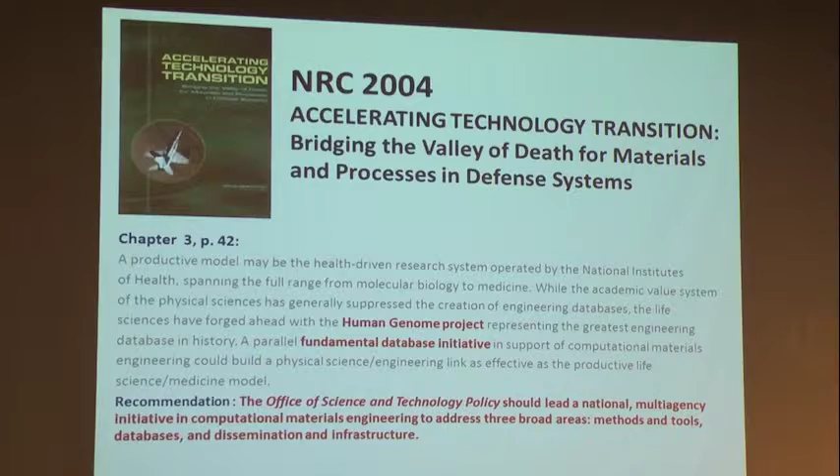Now, the White House white paper is not necessarily what I would recommend to understand clearly what is meant by the materials genome. What I do recommend is the National Academy study of 2004, which was on the acceleration of materials and process technology, and specifically addressed what have become the goals of the Materials Genome Initiative.

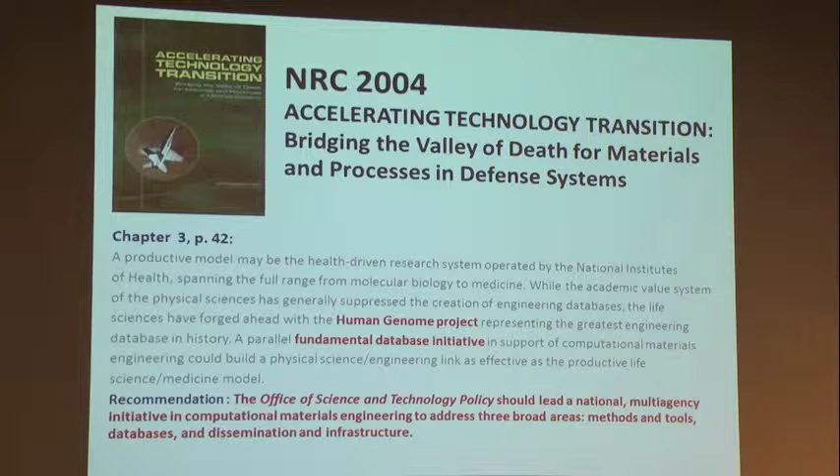This report reviewed the best practices in place in industry for this kind of materials acceleration technology, and then went on to predict what it is, what are the opportunities, where should we go, and it actually discussed the Human Genome Project as the biggest engineering database in history that was created not to support just the life sciences, but to support science-based medicine.

And so the analogy was to build out a similarly fundamental database system to not just support material science, but support the science-based engineering of materials. So I think this report gives a pretty clear concept of what is meant by this genomic metaphor.

And the recommendation went on to recommend specifically what actually did happen for the Office of Science and Technology Policy to organize a multi-agency initiative that would not only be the building out of this fundamental genomic database system, but the methodology and infrastructure, both for research and education.

The highest achievement so far in this technology was 5 years ago, with the first flight of stainless landing gear steel designed at QuesTek. This represents the first stainless steel to meet the mechanical performance requirements of aircraft landing gear and thereby eliminate toxic cadmium plating.

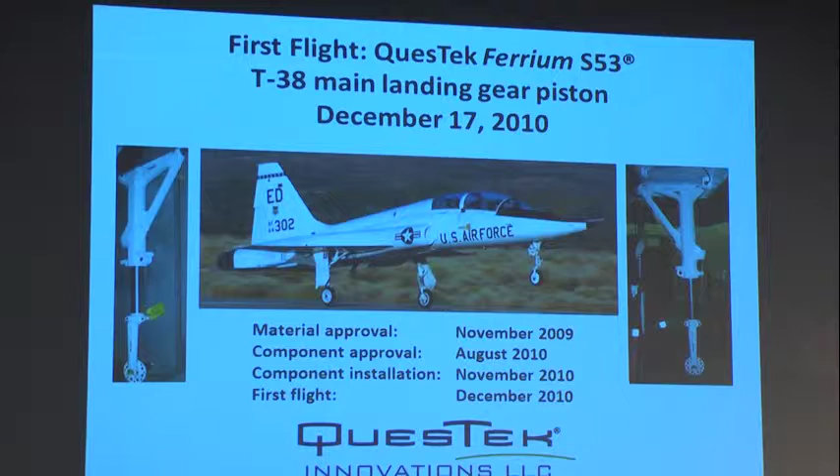But more importantly, it represents the first fully computationally designed and qualified material. This represents a certain maturity of this technology, which is acknowledged by the timeline here.

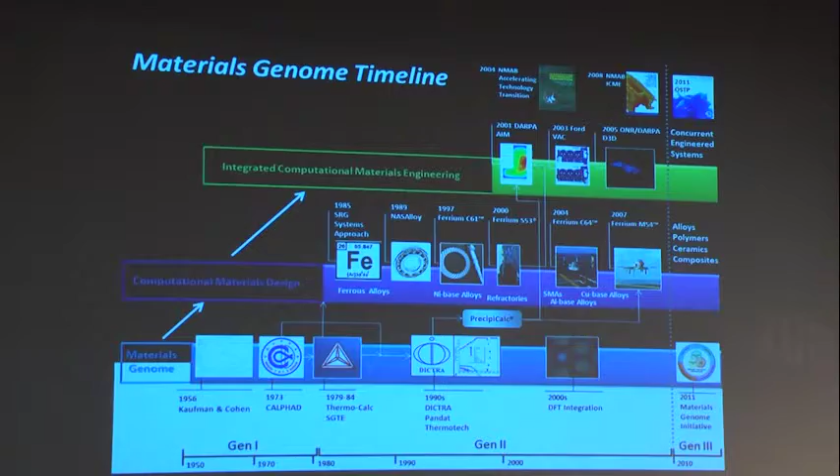There's a lot of debate about what a materials genome could be. It's quite clear that the genome we have is represented by this bottom line of the CALPHAD system of fundamental databases of phase-level attributes, whose origins can be traced back to Kaufman and Cohen in the 1950s.

It grew to be an international organization in the 1970s under the name of CALPHAD, and led to a number of small businesses and commercial software and database systems.

It has evolved beyond simply solution thermodynamics to expand to many phase-level attributes, including atomic mobilities, atomic volumes, and even elastic constants. It was originally based on empirical measurements, but as the accuracy of DFT quantum mechanical methods has improved, DFT has become an equal partner in contributing the fundamental quantities that go into those assessed databases.

Under CALPHAD, it's been well developed for inorganic materials, but really there's a parallel activity in organic materials that's as old and almost as well developed at this point.

It was the appearance in the early 1980s of the Thermo-Calc software, commercial software, and the European-based SGTE database standards that gave a new level of accuracy to this technology, and that inspired our founding in 1985 of our Steel Research Group Design Consortium.

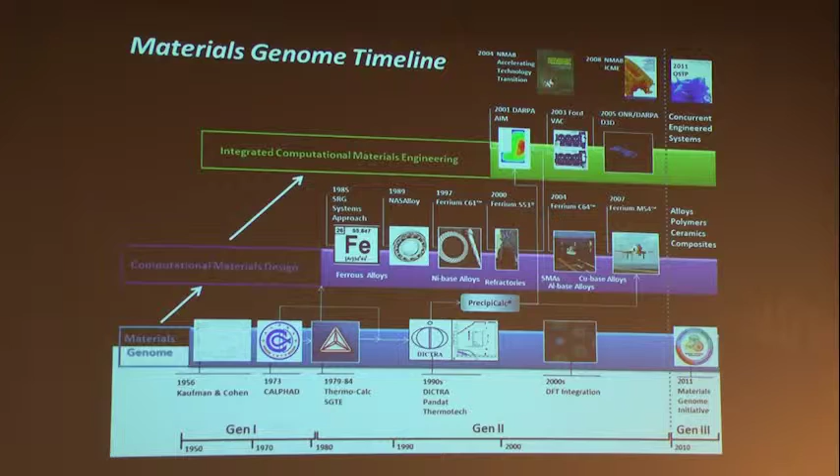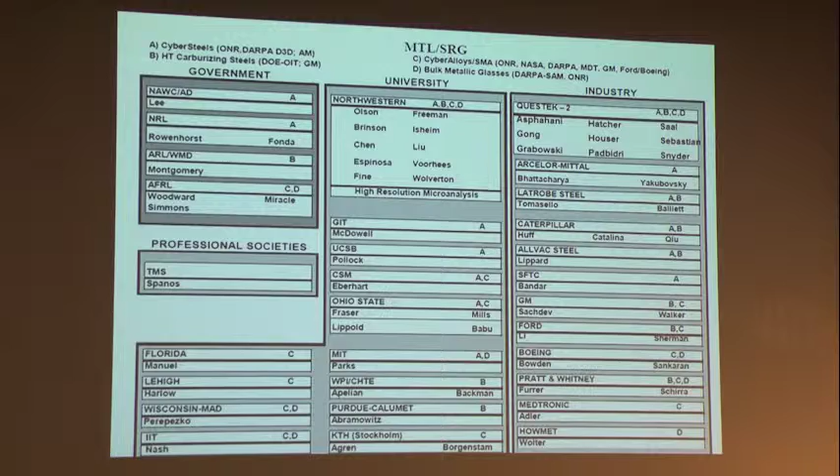That Steel Research Group in its current form has the recent participants summarized here. It's been a collaboration of government laboratories, university, and industry, representing the perspective of not only materials science and engineering, but materials users and materials suppliers.

The foundation of the approach is in the writings of the late Cyril Stanley Smith, who wrote extensively about the concept of interactive structural hierarchy in materials, acknowledging that there is an intrinsic complexity to real materials, for which he advocated we should be taking a systems approach—the same framework of systems engineering used across all other engineering fields, applying our knowledge of materials and treating materials themselves as systems.

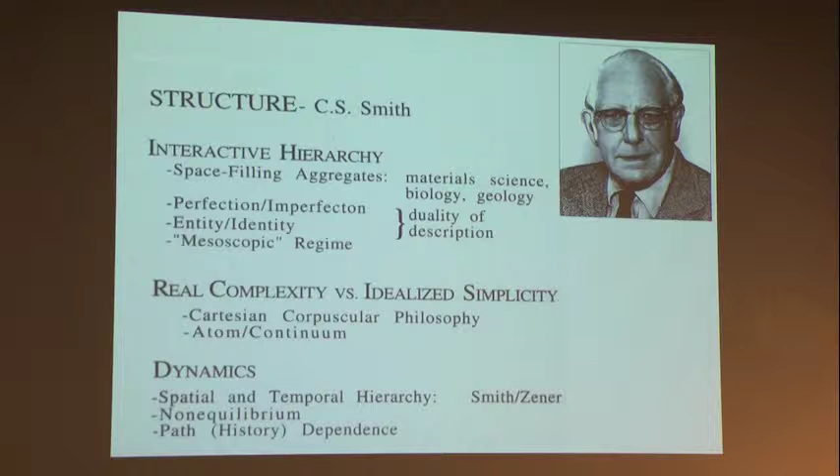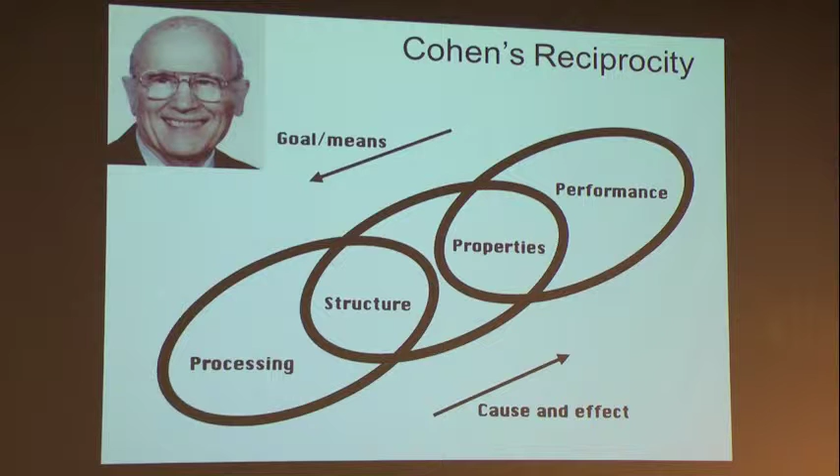We use this as the backbone of a system representation of the material, to which we then add Smith's view of structural hierarchy, so that each design project begins with this type of a system chart. This is to represent what the material is, and to start with trying to get the entire material on one page to make sure we don't miss anything important.

So what this shows is the combination of properties that determine the performance of the material in service. Those properties can be mapped back to a hierarchy of microstructural subsystems that dynamically evolve throughout the stages of materials processing. This then allows us to identify and prioritize the structure-property and process-structure links for which we want to build predictive design models.

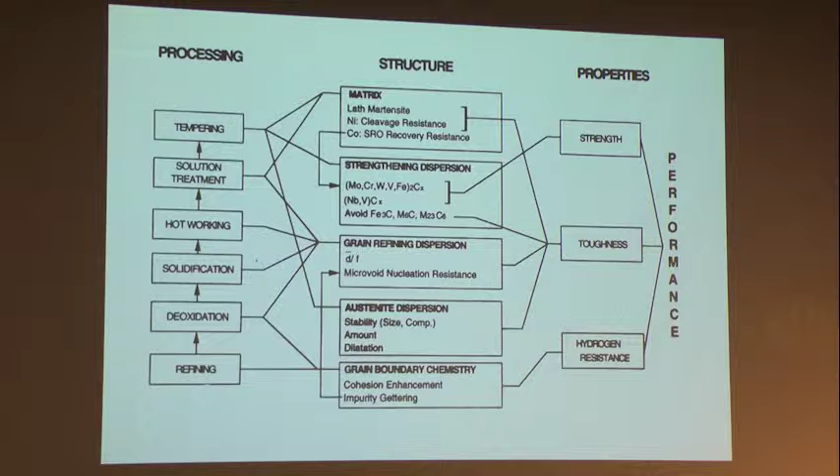Now, at that point, we could build relatively superficial empirical correlations. The opportunity, though—the much more predictive capability—is to use our mechanistic knowledge, made quantitative by these fundamental databases, to build science-based predictive tools that can go beyond interpolation to really predict bigger changes in the attributes we need to control in the materials. So that was the concept from the start.

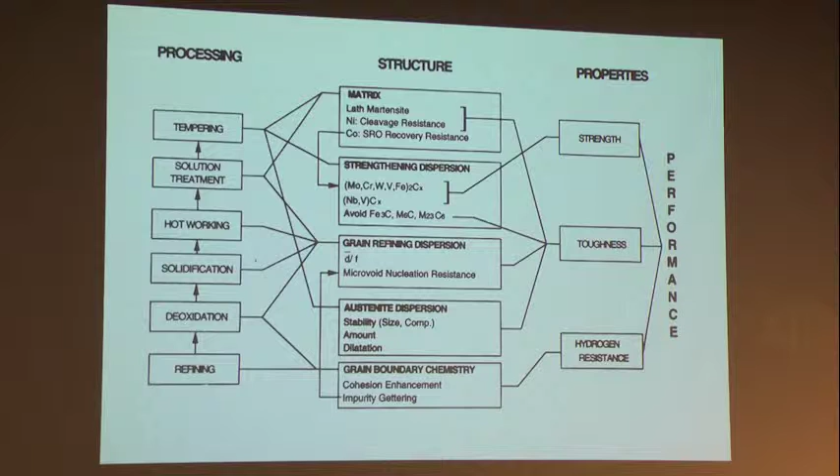And this, of course, motivated a lot of research in the 1980s to make our scientific understanding sufficiently quantitative to implement this. The models that have come out of that we used are summarized by this hierarchy, which is integrating material science, applied mechanics, and quantum physics.

So at the deepest level, as I mentioned earlier, the DFT methods have improved in their accuracy, where they are allowing us to directly predict fundamental thermodynamic quantities. Where that's been most useful is in surface thermodynamics, which is the most difficult to measure. So that's given us direct predictive control of a number of surface phenomena.

Where the material science is most quantitative is in the theory of both precipitation and precipitation strengthening, which has allowed us to treat our strength goals as constraints within the design.

Where the applied mechanics fits in is the simulation of various unit processes of fracture, which give us new structure-property relations to set new microstructural objectives in design. And it's really these three levels here that define our meeting performance goals in the design.

Equally important is materials processability, and that's addressed by our models of phase transformations—the solid state phase allotropic transformations, as well as the liquid-solid transformations, which are really the most scale-sensitive parts, very important to process scale up. The ability to model that up front means that we can constrain the design of a material for the final scale of production and eliminate empirical scale up.

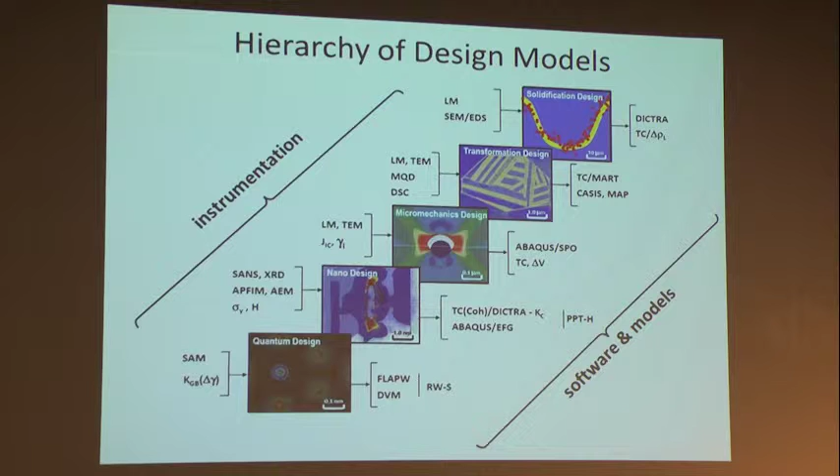And again, how we bring this all together is through a kind of parametric design that's deliberately structured to exploit the capabilities of these fundamental databases.

An example of the research that we undertook: this is a thorough study of the precipitation hardening behavior in what was the highest performance steel of the time back in the 1980s. This research was actually undertaken under a 1989 Air Force nanotechnology program that allowed us to bring together a wide array of experimental techniques of the order of ten, including small angle neutron scattering.

And this allowed us to then map out in detail the evolution versus tempering time of particle size, particle shape, number density and phase fraction, the evolution of the lattice parameters of the carbide phase and its composition trajectory, and the evolution of the hardness and strength.

This thorough characterization allowed us to validate the theory of precipitation at high supersaturations, which allowed us to parameterize that precipitation behavior, where thermodynamic driving forces control particle size and diffusion rate constants determine the time scale. This enabled a parametric approach to designing precipitation strengthening efficiency in these steels. With those methods, we've designed steels that for a given carbon content are 50% stronger than previous steels.

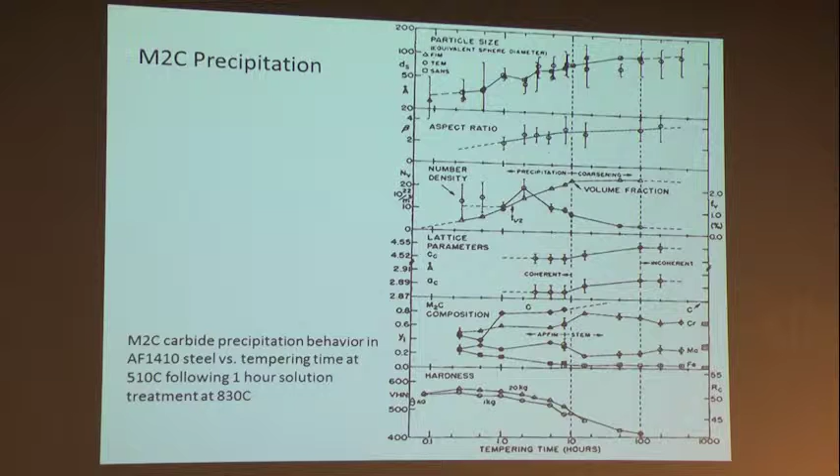One of the most ambitious problems was intergranular stress corrosion cracking due to environmental hydrogen interactions, as affected by prior segregation of embrittling segregants. A very important early contribution was the work of Rice and Wang at Harvard, who developed a surface thermodynamic description of interfacial embrittlement by these components, where the embrittlement potency scales with the difference in surface segregation energy between a free surface and a grain boundary.

Initially, unique to iron, there was enough data to test this correlation with measured surface thermodynamics. We went on to correlate the same quantity to the energy differences predicted from our DFT calculations, showing that we could correctly predict the relative embrittlement potency of phosphorus and sulfur, and the cohesion enhancing effects of boron and carbon.

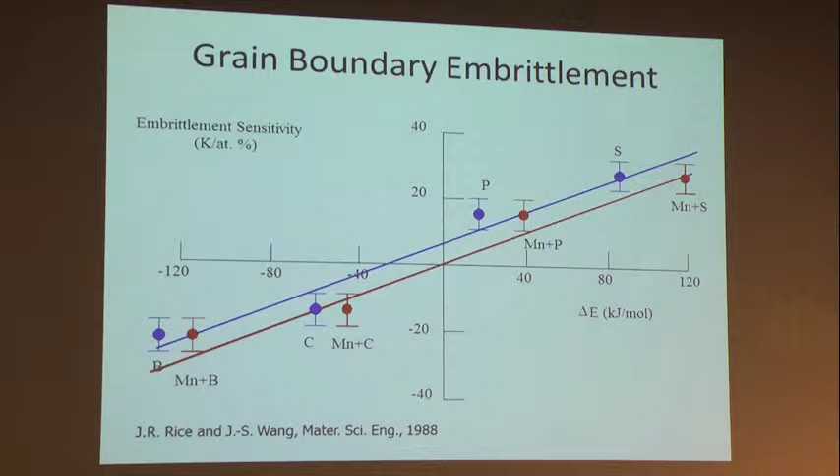Less well known at the time was the role of substitutional alloying elements. The same methods were used to predict their effects for a handful of cases with rigorous calculations, which calibrated a simplified model to make these projections, allowing us to identify the largest negative numbers—the strongest substitutional cohesion enhancers. This was then validated with more rigorous calculations.

This was then used to design the first of what we've called our quantum steels, where by designing new compositions to control grain boundary composition, coming directly from a quantum mechanically predicted genome, we have completely eliminated the intergranular mode of stress corrosion cracking in these very high performance steels.

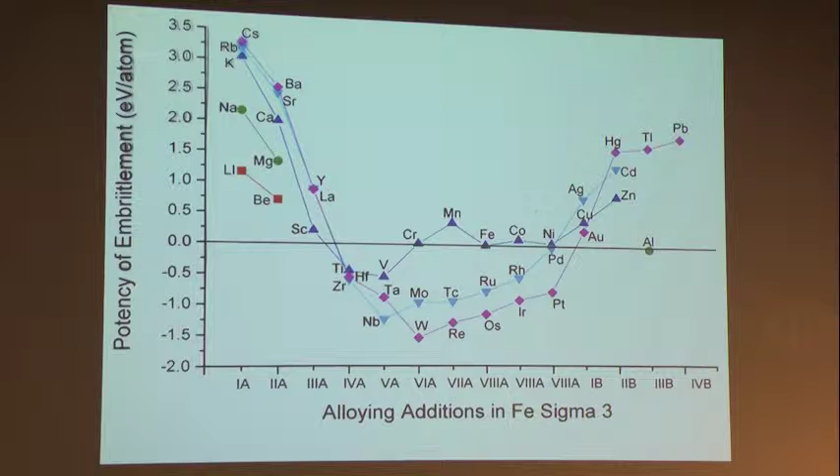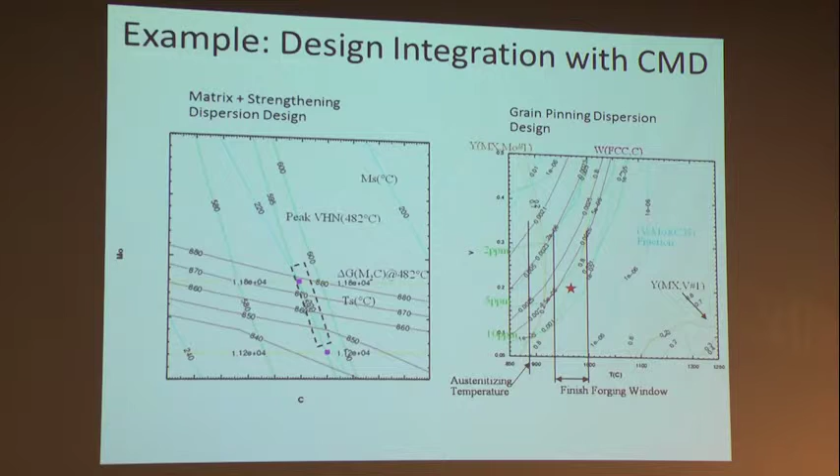This has yielded the first four commercial steels represented on this chart. In addition to the stainless landing gear steel, we have a high toughness steel for carrier-based applications that's been flight qualified, and a pair of very high performance gear steels doing well in off-road and on-track racing, currently being qualified for helicopter applications. All four use efficient strengthening through control of the carbides, where in every case the carbide size is optimized at 3 nanometers, as validated by 3D atom probe reconstruction.

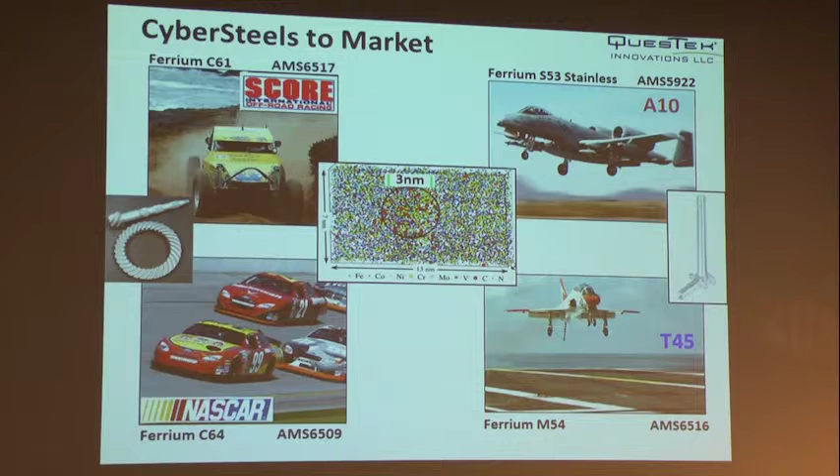Now that's the achievements of the design process. This is a summary of the normal process of empirical development, where on laboratory to small scale, we will find prototypes that meet our requirements. We would then start experimental scale-up and process optimization at the component level, and ultimately measure manufacturing variation so we can specify minimum property design allowables.

The process of materials design really only itself impacts this first leg, which amounts to only 10% of the time and cost of getting a material to an application. So it was the goal of the DARPA AIM program, starting in 2000, to look at, based on the success of the methodology demonstrated here, what is the methodology and tools that can address the rest of this cycle that would really have the impact.

Our opportunity under the AIM project was to do this in collaboration with Pratt & Whitney and GE in the context of aeroturbine disc alloys. This introduced us to the architecture of computational engineering of aeroturbines, where all these different tools of macroscopic behavior and processing are linked together by the iSIGHT process integration design optimization software system.

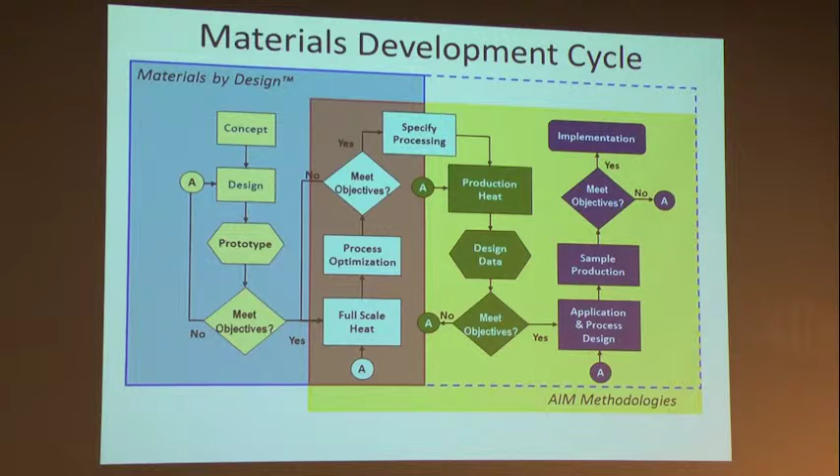What was necessary under the AIM program was to build a microstructure simulator, PrecipiCalc, that we could then link to heat transfer simulations to map the evolution of rather complex microstructures in response to the thermal history as a function of position in a turbine disk.

We also had to calibrate and validate structure property models that were implemented as analytical functions, and that was done in a spreadsheet. So really, PrecipiCalc was the new numerical simulator that we had to have to enable this technology.

After calibrating against existing turbine disks, a demonstration project was done where a subscale turbine disk was designed using these tools and tested to overspin failure to validate the performance predictions. It also gave us the opportunity to section companion forgings and validate the predicted spatial variation in the forging of microstructure and properties, where we were able to predict that spatial variation well within part-to-part variation.

Then that sets the stage for what was the most ambitious challenge: the early forecast from limited data of the distribution of properties, in this case yield strength, that would come from the allowable variation in process specifications over 6 stages of turbine disk manufacturing.

The strategy we developed there was to use our mechanistic models to get the shape of this cumulative distribution function, and then use limited data to recalibrate that by linear transformation only, where the idea is limited data can only inform the first 2 moments of the mean and variance and cannot define shape. So what we need from science is the prediction of the shape of the distribution. Limited data can give us that final calibration to give us accuracy.

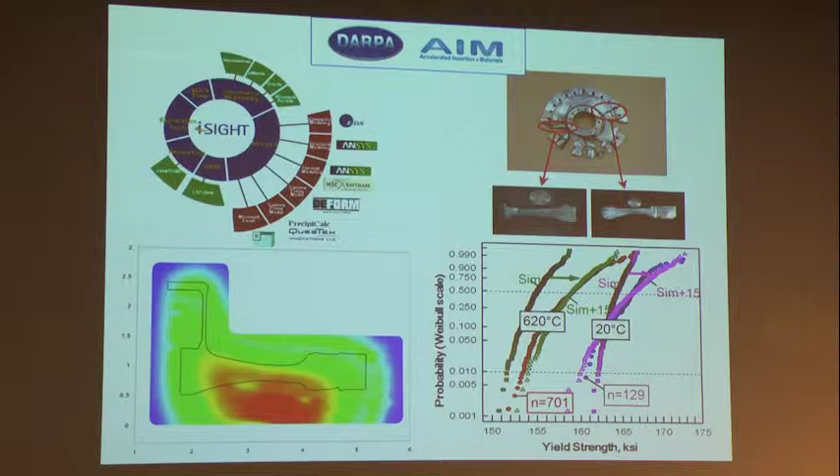As I mentioned, it was the 2004 study that was specifically focused on this kind of technology acceleration and best industry practices, and concluded that the best was, at that time, what had been achieved in the DARPA AIM program. Now, there's been a lot more attention given to this 2008 study that coined the term Integrated Computational Materials Engineering. But this actually cited examples that wasn't about new materials. It was about better application of existing materials with models. I think as well that to generate broader interest in the technology, it kind of set the bar low in terms of what some of the industry practices were under this umbrella.

It unfortunately created a sense that this technology is rather immature, where ironically, the earlier study actually emphasized the maturity of the technology. But I think another important characteristic of this study, and there have been now about 7 National Academy studies pointing to the potential of this technology, it was the 2004 study that uniquely really called out the leading role of the network of small businesses that have actually created and maintained this technology.

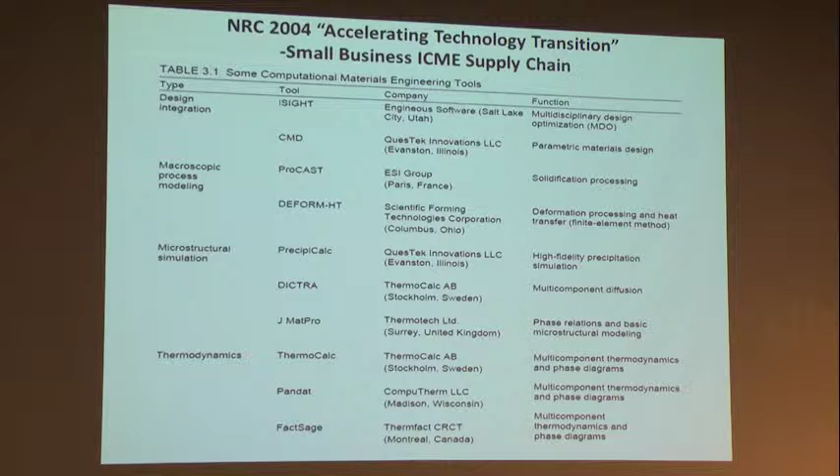This is a summary of where we were a decade ago in terms of the companies and the softwares and database systems that they've maintained to really generate this technology and continue it. And I would say today, this is still where the forefront is of this technology.

So the stainless landing gear steel I described earlier was actually brought into the DARPA AIM program. It was designed concurrently with the creation of the AIM methodology. It was brought into the program to be the first demonstrator of the application of this method to a new material.

Under follow-on funding from DARPA, the goal was to take the data we would have from 3 production scale heats of the material to make an early forecast of the 1% probability A basis allowable that ultimately has to be statistically demonstrated with 10 full-scale production heats, which is a lot of expensive inventory of steel.

This shows the predictions that were made. The blue curve is the Monte Carlo simulation of the shape of the function. This is the calibration of the first 3 heats. This then is the final validation where we meet all the requirements of the 10 heats. And once again, we got that 1% probability value within 1 KSI.

In this case, in order to be a drop-in replacement, it was vitally important that we match this 280 KSI minimum number that allows us to replace the existing steel without any design changes of the components. In practice, at the level of 2 heats, these forecasts were able to show that we were at risk of not meeting that quantity. So we were able to re-optimize the processing very early in the qualification program and save a lot of time and cost to meet that requirement.

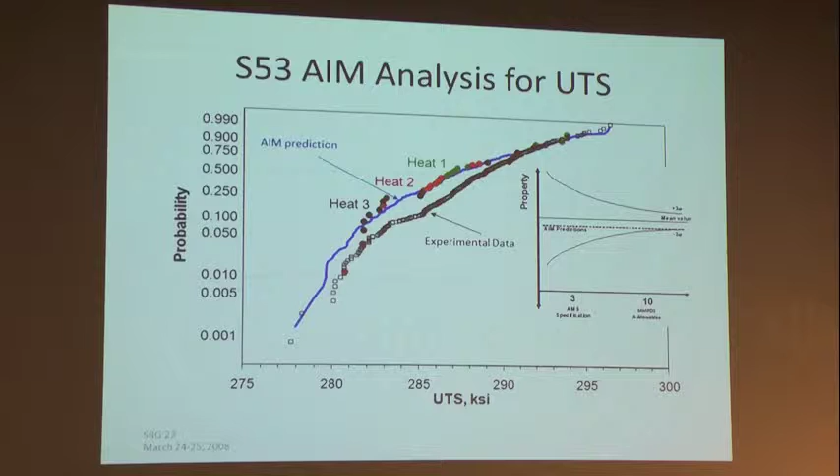The Navy's been the largest supporter of this technology. This was a slide we put together during one of our Navy projects to show the range of applications of this technology that QuesTek has undertaken specifically for the Navy, that cuts a broad range of not only different alloys, but even some ceramic systems as well.

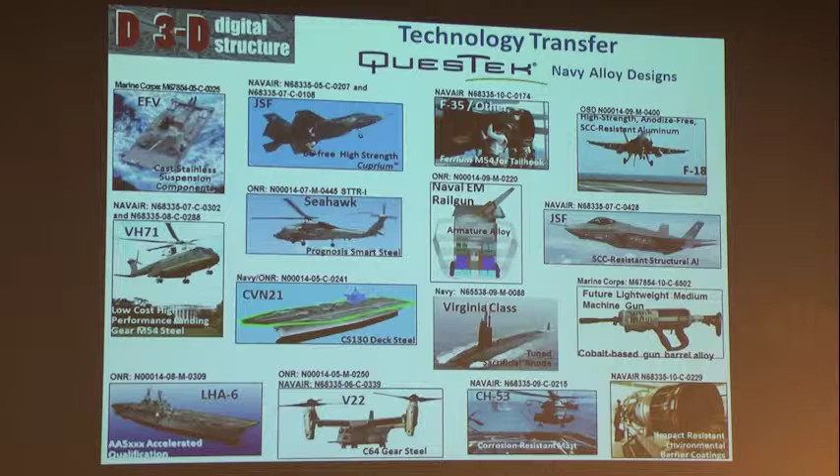More importantly, having done it once before, while we were doing this, it was possible at the level of the first 3 heats that the Navy had enough confidence in our forecast that they went ahead with a manufacturing technology program to apply this new steel in the hook shank application for the carrier-based planes, basically the tailhook assembly, which is a very critical component, and start that manufacturing technology optimization early enough that within 1 month of getting material level qualification, we actually had component level qualification by the ability to make that engineering decision much earlier. So it's not only that we're compressing the materials qualification cycle, we're also compressing the full application cycle through this.

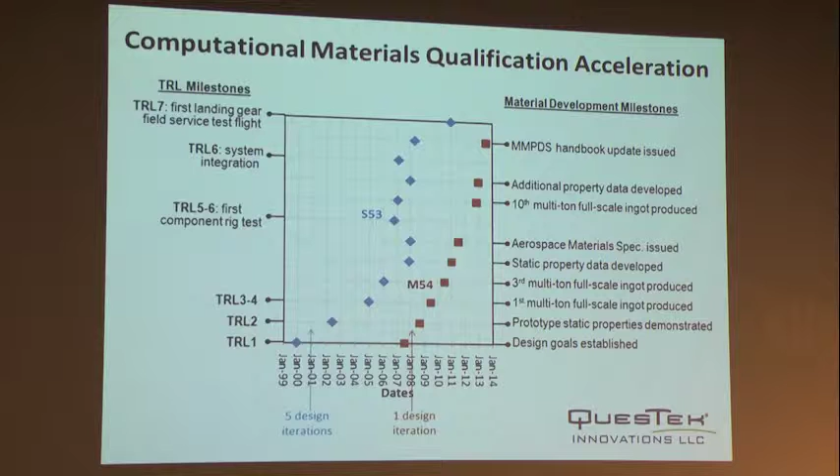Now, both of those examples are from the viewpoint of compressing the materials cycle under conditions where we're trying to be a drop-in replacement. We don't want to change the component. We don't want to redesign. That would slow things down. I think the ultimate impact of this technology is the opportunity for concurrency. Just about all other branches of engineering except materials are able to work together to accelerate the full technology development cycle, and with this acceleration of materials cycle, we can then become a part of that and look at the value of the concurrent development of materials and structures.

Where we first explored that a decade ago is in an upper undergraduate interdisciplinary design project course, where we were able to draw on 2 channels of Navy-supported research at the university. One was novel panel structures for weight-efficient blast protection, and the other was new steels we were designing for blast protection. In the context of anti-terrorism blast mitigation, this team for the first time looked at taking those simulation tools for the study of the structures, plus the new properties we projected as designable, and put those together. It forecast what performance could be achieved, but most importantly, it actually redirected the materials design work to meet new property objectives, and that research is still underway since then.

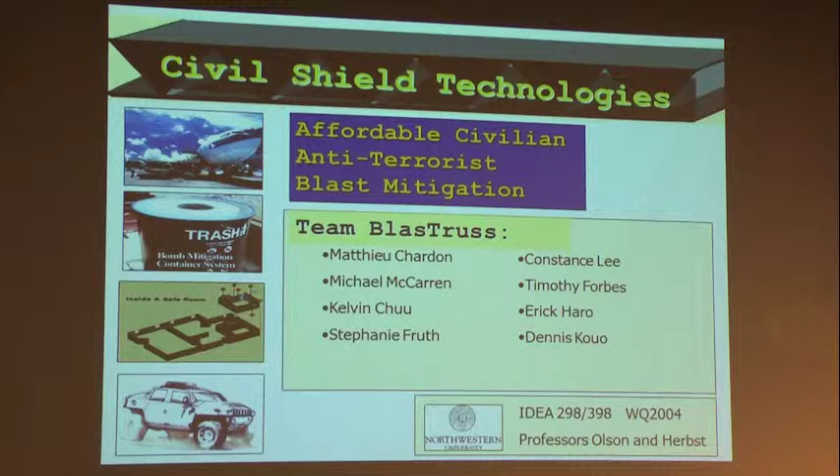As far as the highest achievement in that kind of concurrency, the best example is what was announced in September in the Apple Watch. It's not unusual that Apple does market their materials as part of their products. This is the first time that Apple marketed their own materials. There actually were 4 new alloys with very significant performance improvements that were announced with the Apple Watch. It turns out that those ambitious property achievements, the materials were created and fully integrated into the product in just 2 years from acquiring the technology to do it.

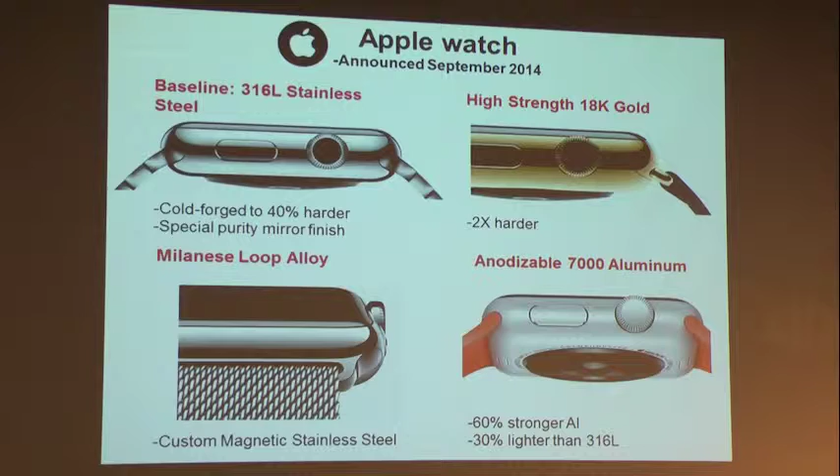Now, the AIM project, we found that relative to standard metallographic characterization, we were predicting microstructure at a level of precision that exceeded the accuracy of standard metallographic microstructural characterization.

That helped make the case for the 5-year ONR DARPA D3D Digital Structure project that ran from 2005 to 2010. The idea was to bring together tomographic tools that could do for materials what the CAT scan has done for medicine, to thoroughly characterize real microstructure in 3D rather than inferring these quantities from 2D. We brought together a suite of destructive tomographic techniques at the atomic level, from the atom probe up through focused ion beam SEM characterization, then serial sectioning and light microscopy, going from the nanoscale important to strengthening, to submicron and multi-micron scales important to fracture toughness and fatigue properties, using this higher fidelity information to inform a next generation of 3D simulators of microstructure in processing and in service.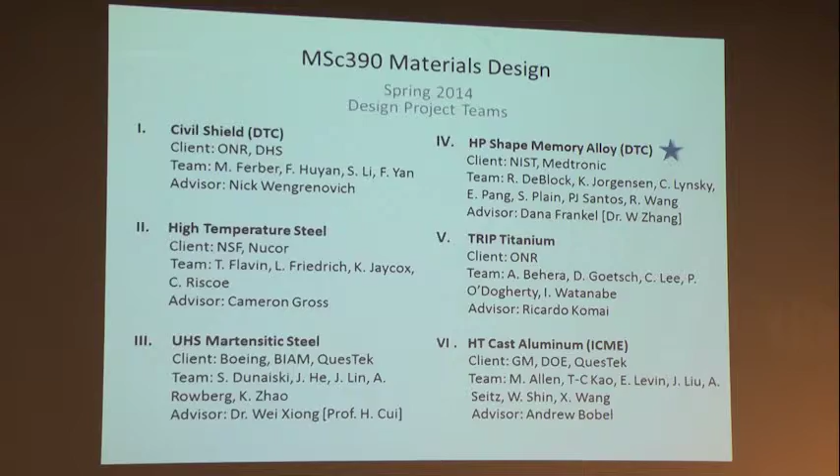Meanwhile, we have this National Network for Manufacturing Innovation, as we've rediscovered manufacturing in the United States. We now have 4 of these institutes, and the most recent are the Detroit-based Institute for Lightweight Metals Technology and the Chicago-based Digital Laboratory for Manufacturing. Northwestern and Questek are involved in both of these institutes.

In the case of the lightweighting metals, it was a chance for our Questek CEO, Aziz Asphahani, to go to the White House, where we had this quote from the president.

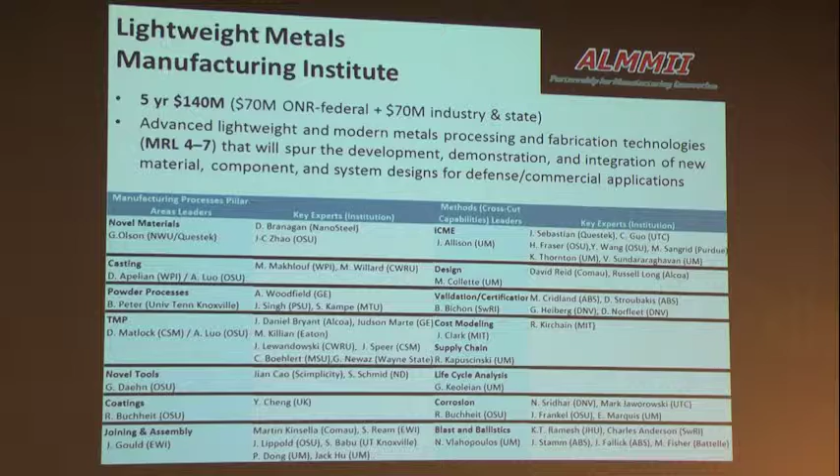I won't go through the details, but these are fairly large-scale programs that between federal funding and industry matching amount to $140 million over 5 years. These are very significant investments in manufacturing technology. It's looking at late stages of manufacturing technology development, but it's very much in the same spirit of what we're trying to do in the acceleration of the material cycle.

On that note, the Materials Genome Initiative was conceived to support the broader manufacturing initiative. What amounts today to the lead center in the MGI is this NIST-funded Center for Hierarchical Materials Design that just started at Northwestern in collaboration with Argonne. This is the first major initiative under the recently formed Northwestern-Argonne Institute, funded for 5 years at $30 million and extendable for a second 5 years.

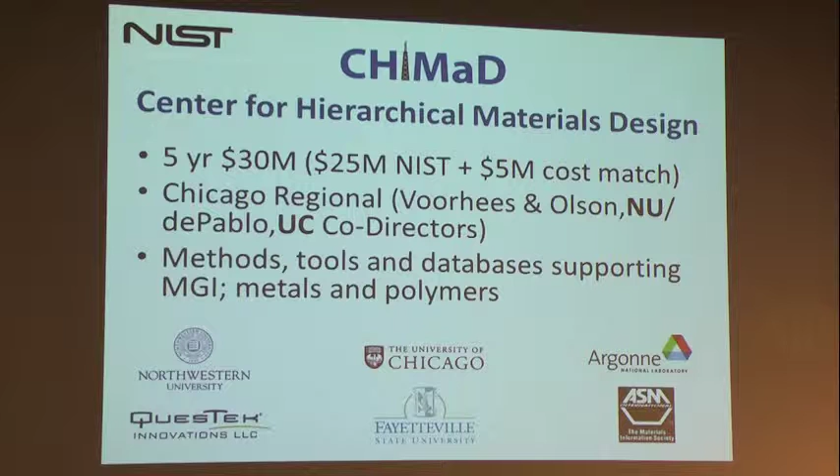Peter Voorhees and I are co-directors at Northwestern, with Juan de Pablo at University of Chicago as a co-director. The idea is not only to improve the overall methods, tools, and databases, but to expand the scope of this methodology and demonstrate a general methodology that spans metals and polymers. So that's not only Northwestern, Chicago, and Argonne, but Questek is a partner in this program to further develop this AIM acceleration technology so that we can demonstrate taking the materials out of this center all the way to application.

The approach we've taken is that all development of tools and databases is driven by use cases in both hard and soft materials, which then drives the full suite of database systems being developed. We have 2 levels of precipitation hardened alloys, eutectic reinforced silicon-based composites, and in soft materials, a number of projects including biomaterials.

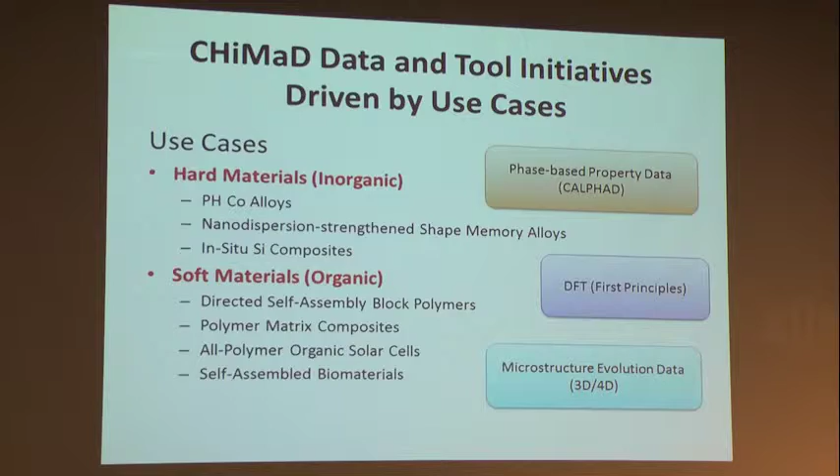This is the overall scope of the center activities, where the top level is the overall technology of materials design and AIM accelerated qualification, represented by these two levels, both supported by mechanistic models of process structure and structure property behavior that are structured to be made quantitative by the fundamental CalPhad thermodynamic databases. Shown in yellow is the hierarchy of databases under development through this center.

Right now, one database that already exists is the database of materials properties that is searched in material selection by the Granta search and selection system, and that's where we send our output design allowables today.

Below the level of the existing CalPhad phase level databases, one of our primary database activities is building a pre-CalPhad protodata repository that will be hosted at NIST, where we send the raw data of tie lines, phase relations, calorimetry, and DFT predictions. That is the raw data we use to feed the CalPhad assessments. That's under construction, and that's where we're sending the fundamental data being developed right now.

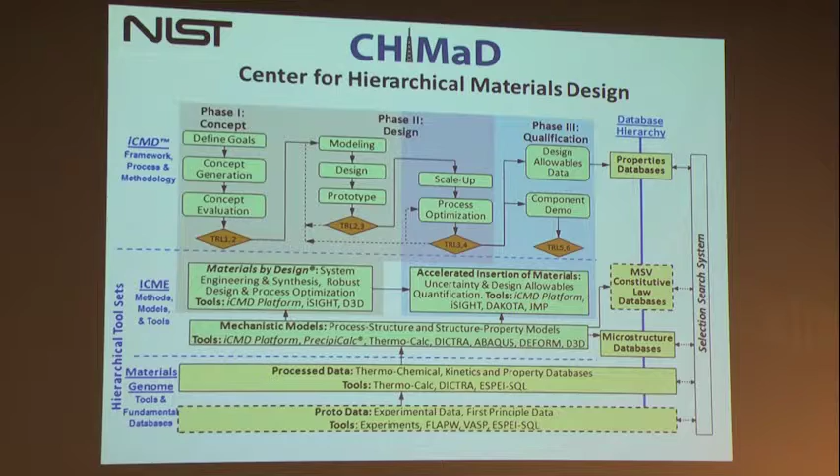One of the new capabilities we're exploring is the opportunity of high throughput DFT calculations, making large numbers of relatively small calculations with current supercomputing capabilities. Chris Wolverton's been collaborating with us. Here's an example where he's developed hundreds of thousands of compounds and predicted their relative phase stability and other attributes

that can help us during materials design to assess the feasibility of alternative compounds that could perform better than the phases we're already using.

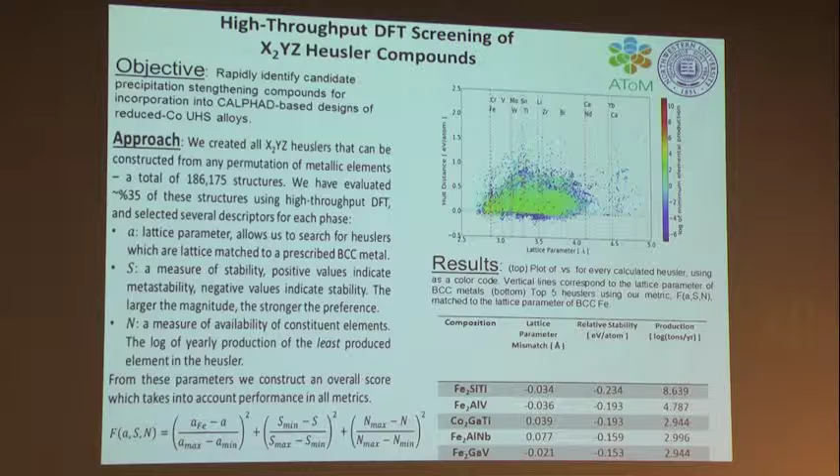This is an example of that expanded search capability, where currently the Ashby materials selection system uses cross plots of materials properties to select them. Here's an early example we did in the design of an oxidation-resistant niobium alloy, where similarly we're looking at cross plots of thermochemical and thermophysical properties of potential oxide scales, and kinetic properties of parabolic rate constants and relative diffusivities in the substrate,

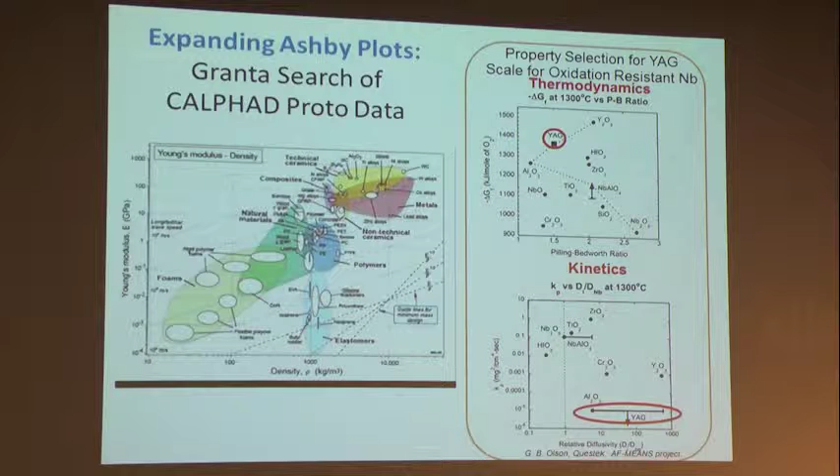so that we were actually able to identify yttrium aluminum garnet as a multi-component scale that could give us an oxidation-resistant niobium alloy, and we were able to actually implement that and demonstrate it. So this is the type of thing we want to do more of.

The other area there's a lot of interest in today that's come out of the realm of big data is data mining practices. One thing we're looking at is where are the opportunities where materials data gets large enough to be worthy of applying these statistically based mining efforts.

But the other issue we're looking at is, unlike some other fields where there's very little mechanistic knowledge to be an alternative to empirical correlation, in materials we have a lot of knowledge, so we are exploring ways to modify these methodologies. Instead of assuming total ignorance, we use not only data, but we take the mechanistic knowledge we have to transform that data before we mine it.

One of the demonstration projects we ran in an undergraduate class last year was to use a fatigue property database from NIMS in Japan, which had about 400 different alloys, their composition, processing, and final performance, to translate that information with the CalPhad thermodynamics into structural attributes and then mine that. We were able to show, compared to the brute force approach, we could get a more accurate representation of the process structure property relations.

In the use cases, we have a large activity in precipitation hardened cobalt alloys, and one of the places where, in addition to going after very high performance cobalt alloys for aeroturbine applications, QuesTek has already designed for low temperature alloys a new bushing alloy to replace beryllium copper.

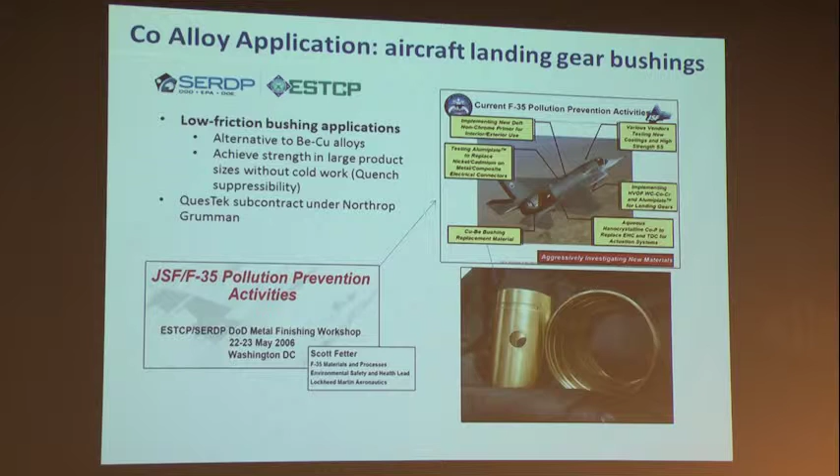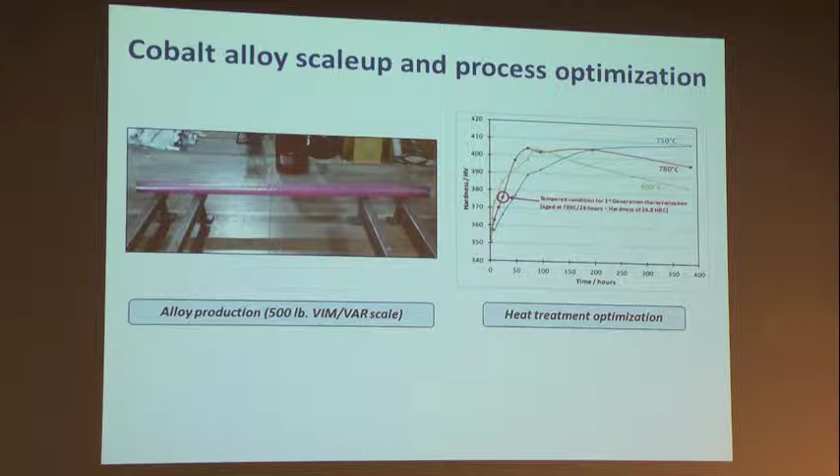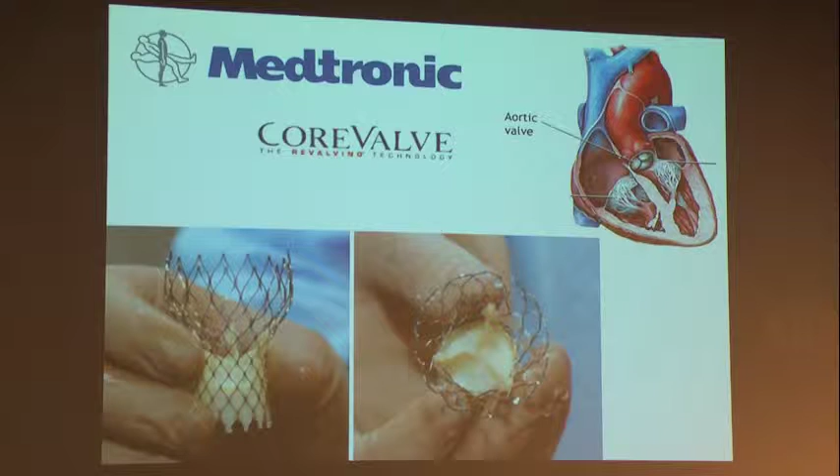This is the area where we're applying the AIM methodology, demonstrating and improving that methodology to accelerate the process optimization of this new cobalt alloy. We're doing very similar things for medical applications, designing higher fatigue performance shape memory alloys that can enable these kinds of medical devices.

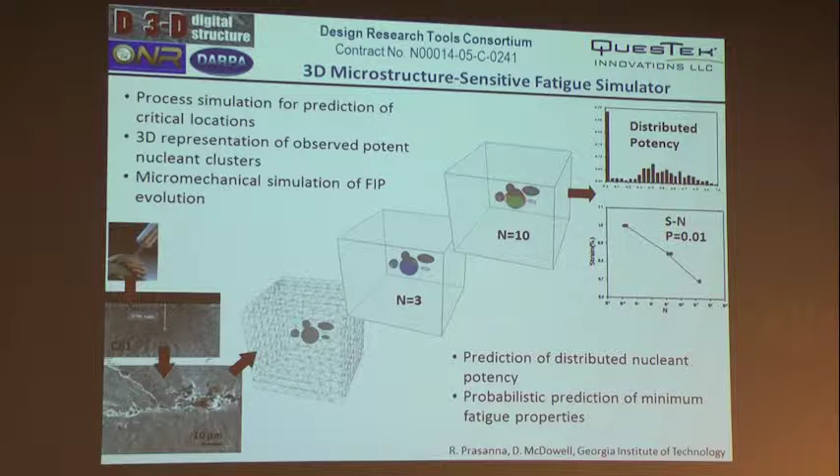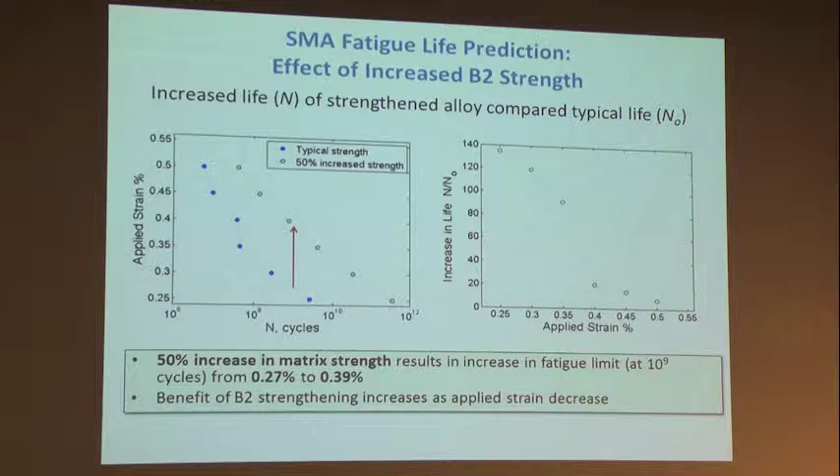Here's an example where we built out, during the D3D project, a micromechanical fatigue nucleation simulator which we've demonstrated in the steels. We're now doing the same thing in the shape memory alloy. Here's an example of the predicted improvement in allowable strain amplitude we can get at a life of 10 to the 9th, which is very hard to measure. The kind of improvement we can get by getting a 50% strength increase is by bringing nanodispersion strengthening into these shape memory alloys.

So where I'd like to end up is, again, the last major project we completed was this D3D project. I should comment that in 2005, the focus was to assess the feasibility of using these tools. Our focus was on destructive tomographic techniques, but we've done some follow-on work based on what we were able to demonstrate, and we now have a number of projects with the APS using X-ray tomographic, virtual tomography, to further enhance and explore much larger volumes of material, to look at sparse microstructural features. So I think we've demonstrated how good quantitative tomography can impact our predictive capabilities.

One of the reasons I was happy to come here and meet with people today is to explore the advancing applications and capabilities, particularly the combination of sample volumes and ultimate resolution that's going to be achievable with these tomographic techniques. We think this is going to be an important additional contribution to what we're doing under the Materials Design Center. But to show how all this fits together, the Navy actually asked us to put together a movie, which we did. Let me see if I can get this to go.

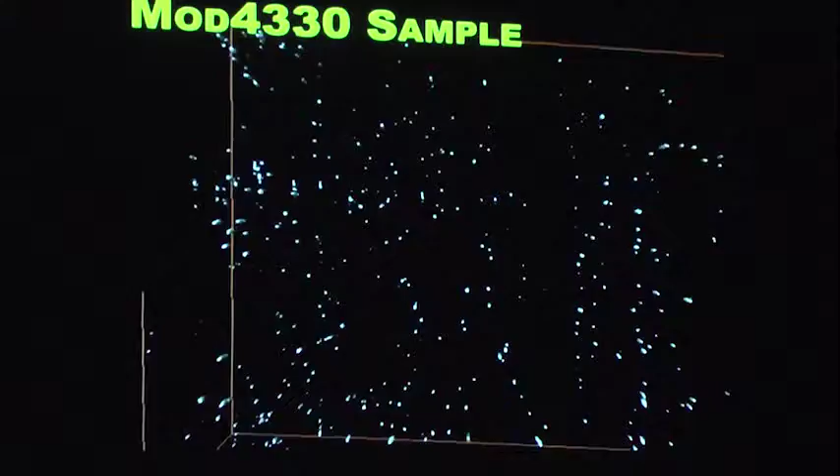The space you are flying through is the submicron titanium carbide grain refining dispersion in a 4330 modified martensitic steel, shown here with better resolution. This is from FIB-SEM reconstruction, where the white particles are the titanium carbides. Also shown are the primary titanium nitride inclusions, and very importantly, the interfacial damage inherited from prior deformation processing.

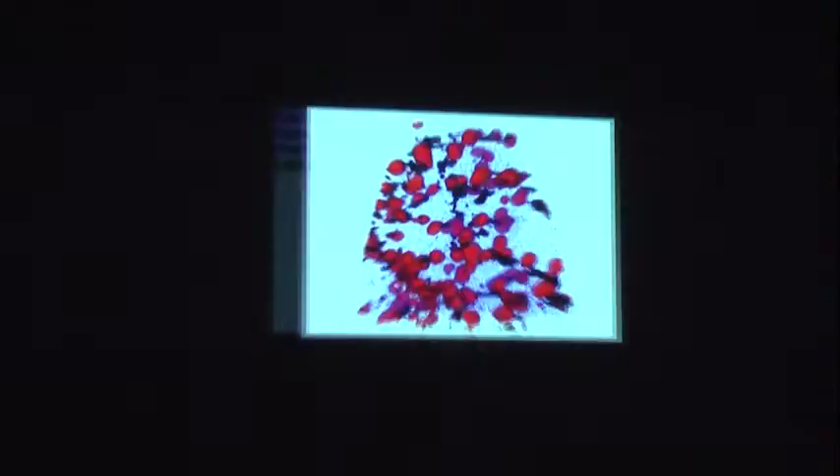Our micromechanical fatigue simulations show that this is a particularly important attribute in the nucleation potency for fatigue.

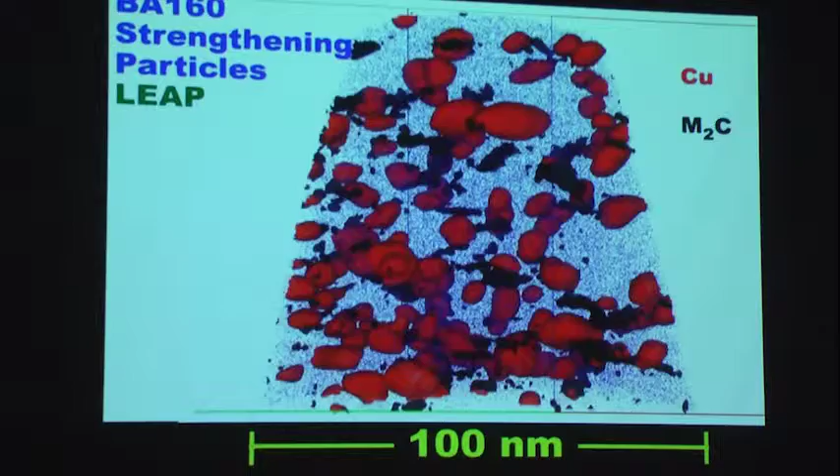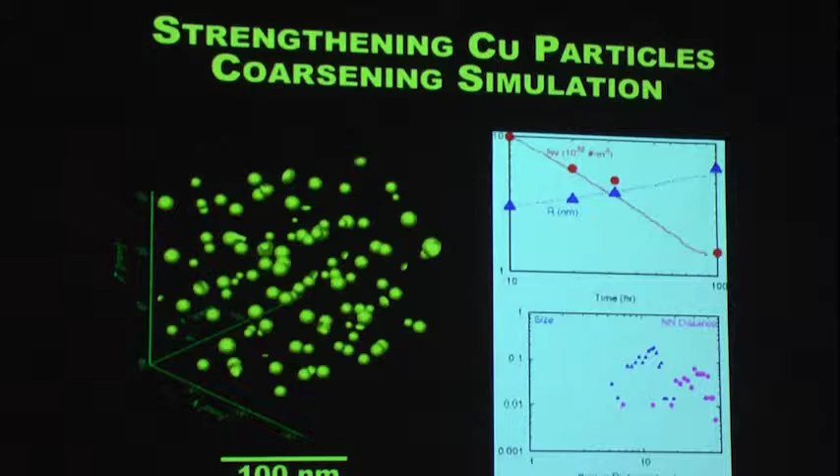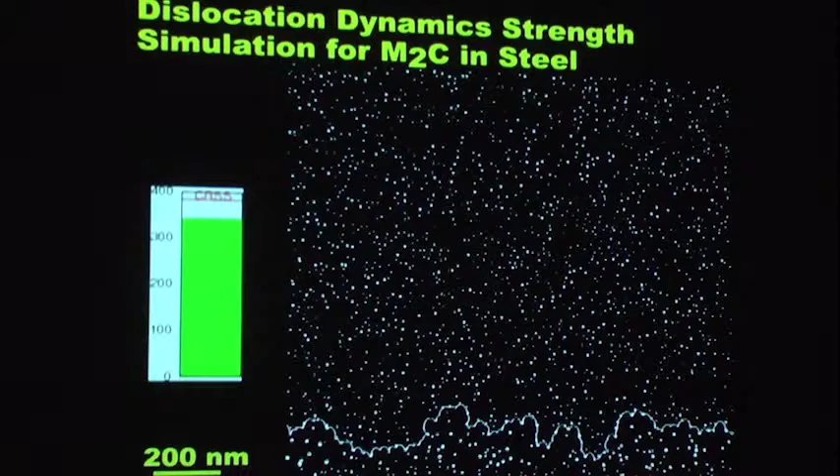Now, zooming in down to the local electrode atom probe, this is a reconstruction of the nanoscale copper and carbide strengthening dispersion in a blast protection steel that we designed for the Navy. The new information this is giving us that we didn't have before is the spatial distribution of these particles. We're simulating that now for the coarsening of the copper particles in a 3D simulator that allows for the diffusion field overlap. Then we're taking a statistically equivalent spatial distribution of these particles, putting that into a dislocation simulator, and measuring the impact on strength of these new attributes that we're getting from tomography, to get greater accuracy out of our strength models by taking this into account.

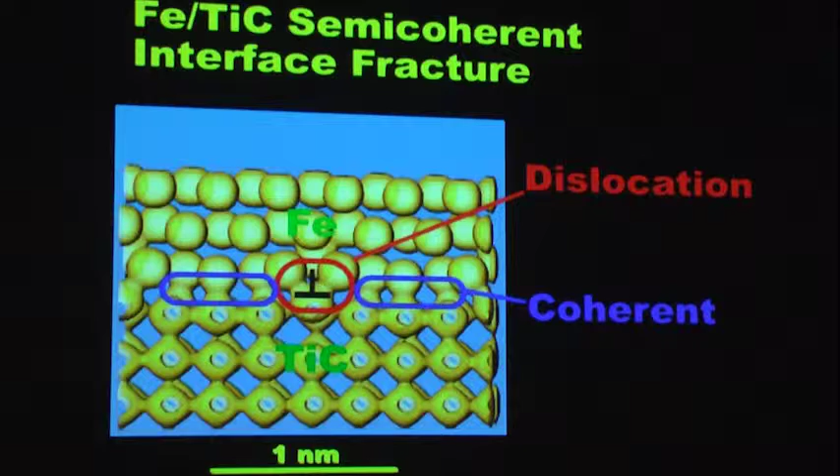Now, moving up to those submicron particles, here what we're interested in is the interfacial adhesion and how it affects fracture processes. We've been able to scale up our DFT all-electron calculations to look at a semi-coherent interface between iron and titanium carbide and calculate the work of adhesion, where we find that it comes apart first at the dislocation before spreading to the coherent patches, thusly.

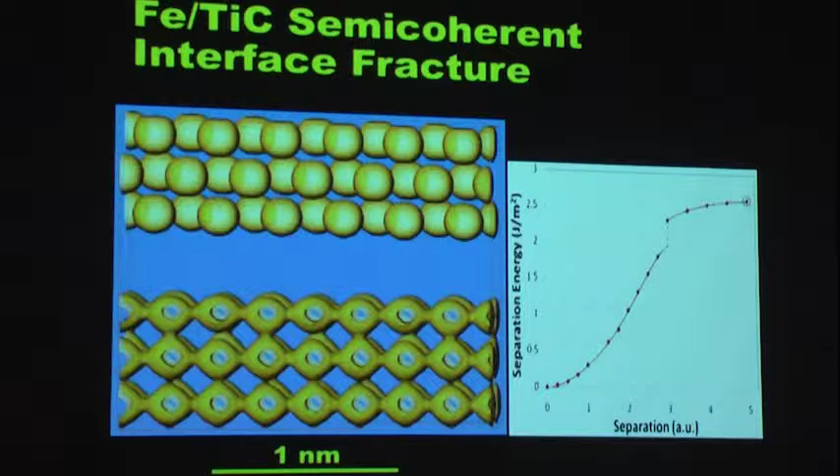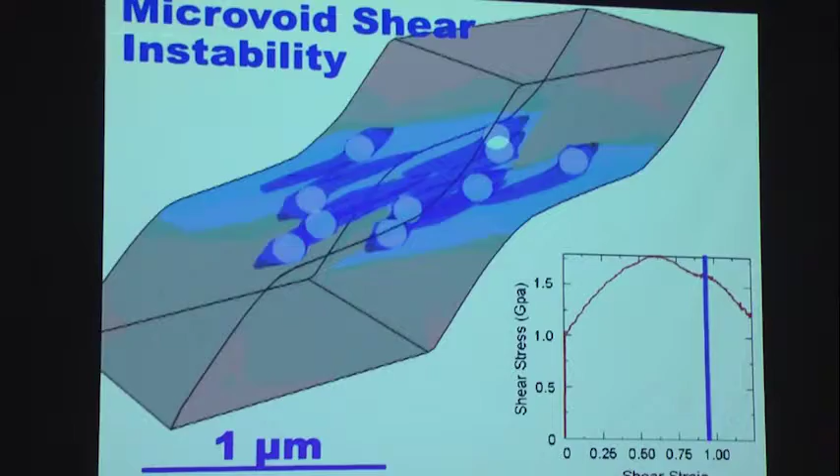That then gives us the work of adhesion that we can put into continuum simulations of the microvoiding process of these particles, which we simulate here. So these particles are allowed to separate at interfaces. It gives us this stress strain curve where the microvoiding is driving softening, that in turn drives the shear localization and describes how the material goes all the way to shear fracture.

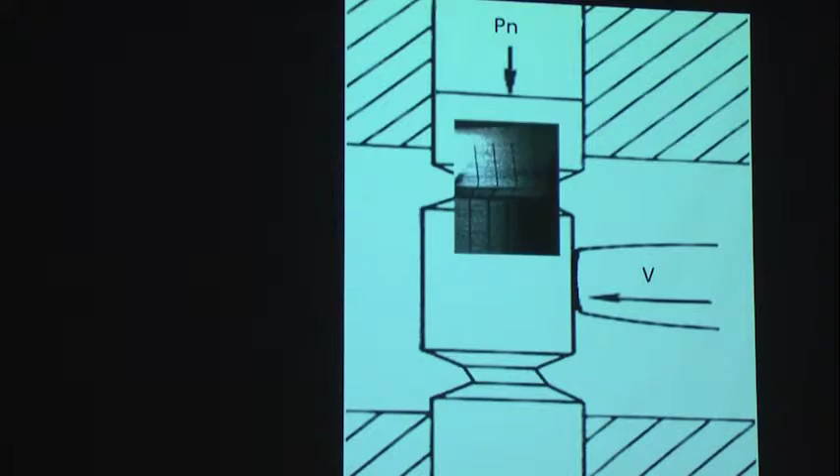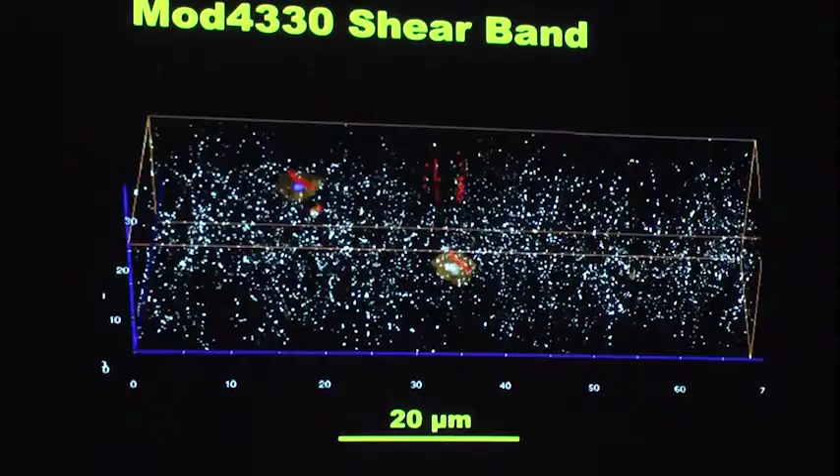Now, the way we validate that is we're taking the material under a linear shear test to the onset of the formation of a shear band, and then by FIB-SEM reconstruction, cutting out that shear band. Here, shown in red, we're able to capture one of the first clusters of those microvoids, very similar to that simulation. As we rotate it around, the primary inclusions are also cracked by the principal stresses. You can also see the anisotropy of this dispersion and how things line up when we look down the forging direction. Now, the context we're interested in is 45 degrees away, in the context of the process zone of a mode 1 crack tip.

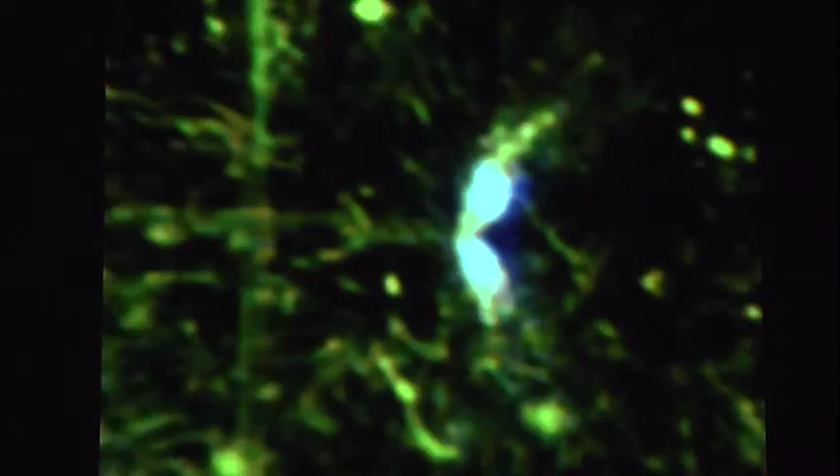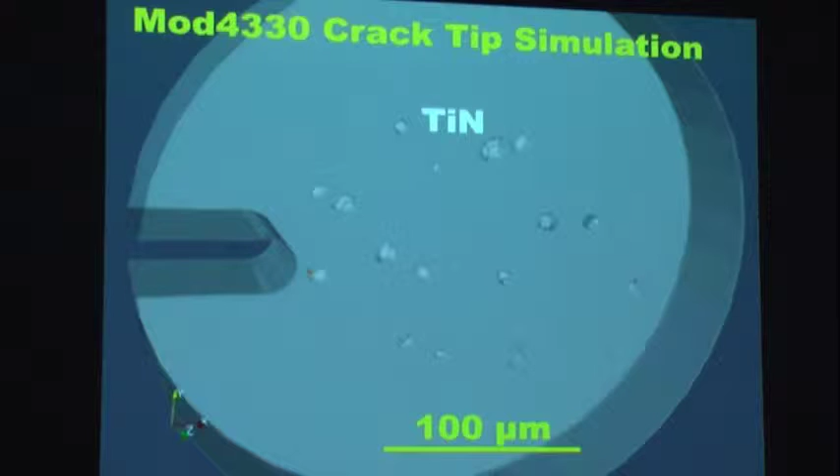We've taken these crack tips apart by serial sectioning and reconstructed the process zone by light microscopy ahead, where you can see the partially intact material has a corrugated washboard type of structure, coming from the shear localization from fine particles accelerating the coalescence of the primary void.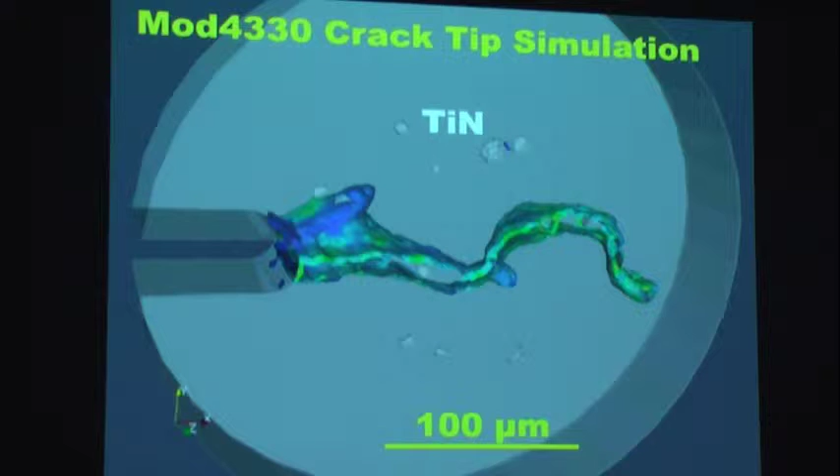We simulate that by putting in a statistically equivalent array of primary voids embedded in a matrix with the homogenized constitutive law coming from submicron microvoiding, and find that we can predict not only the COD toughness, but the actual wavelength of this pattern of shear localization. So we're well on our way to predicting fracture toughness as accurately as we predict strength.

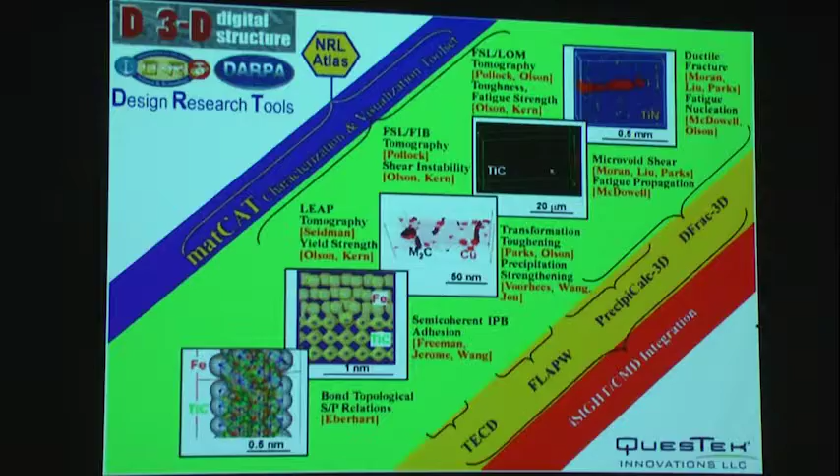We hope. And this is what we hope to be able to do better with the APS. Thank you for your attention.

What's very important is what we can do to validate some of these models. So in the data you're showing, I guess you're looking for some validation—would you think of that as giving an extra weighting factor to the models if it's validated versus not? Is that something you've been thinking about?

Yeah, I didn't really emphasize it, but uncertainty quantification is essential to this technique. From the start, we've had to bring together instrumentation that allows us to really calibrate and validate these predictions. So for any of these model predictions, we do have a good assessment of the uncertainty, which helps us know where we need to make improvements and where we don't.